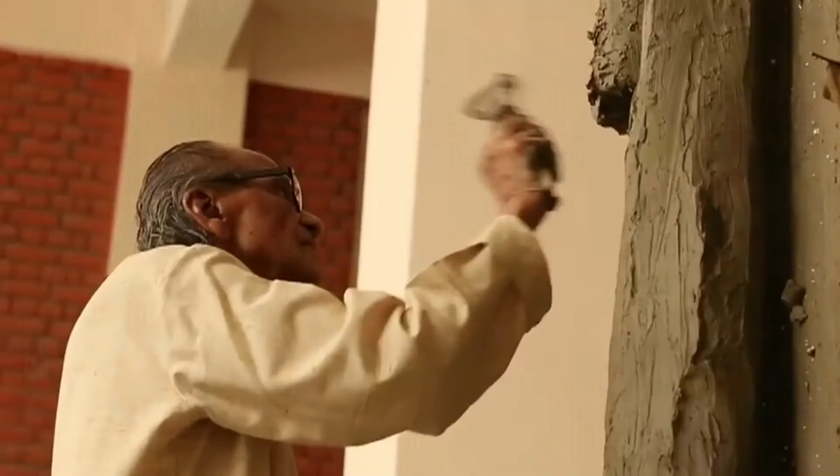The honor of sculpting Sardar Patel's likeness went to Padma Bhushan awardee Shri Ram Sutar. The first challenge was to select an apt pose and expression to do justice to him. Although L&T's role was that of an EPC contractor, they still took active interest in the selection process. Extensive discussions with historians and experts ensued. After sifting through thousands of photographs, the team was unanimous in how the statue should look.

Shri Ram Sutar created sculptures in varying sizes, honing every detail again and again. The latest 3D scanning techniques and computer-controlled production ensured accurate reproduction of minute details.

Immense statues the world over have a broad base to achieve structural stability. Sardar Patel's statue was slated to be the tallest ever, and the greatest task was to achieve the design. His dhoti needed to end above the ankle. He is in a walking stance, thus the feet were not parallelly aligned. The assertive stride meant a gap between the feet. But the L&T team was equal to the task.

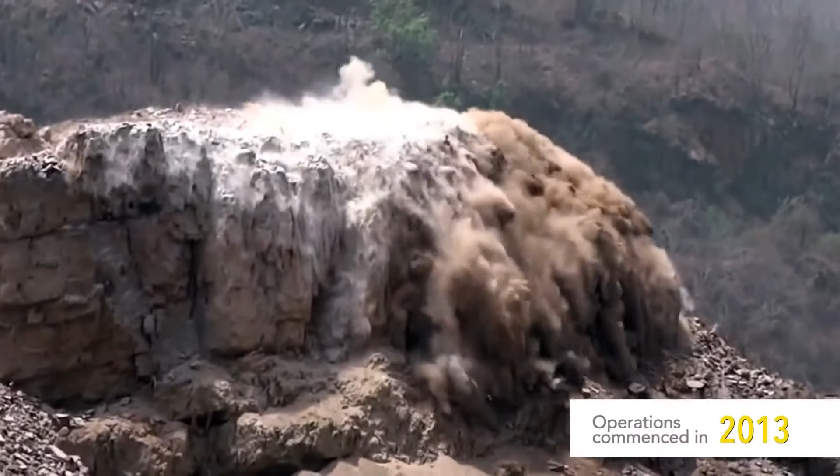Operations commenced in 2013 with exhaustive surveys of the land, riverbed, river and wind. This was followed by critical engineering design, a test of L&T's experience and technical capability. In such a remote location, planning and logistics would be the key to all the operations.

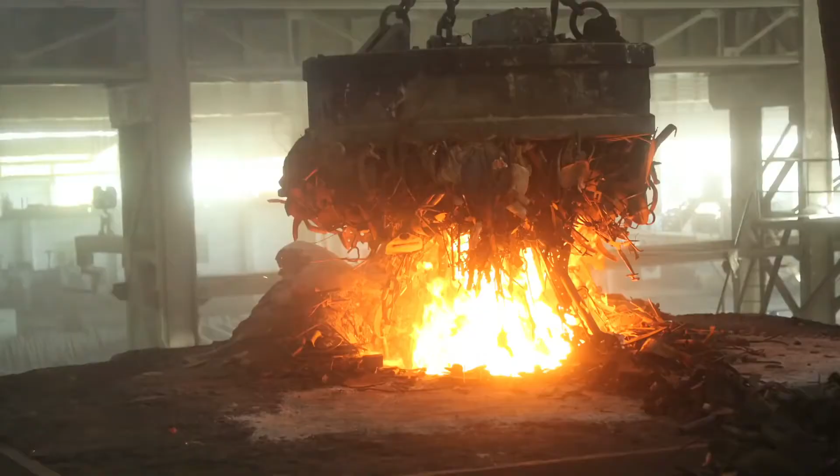The Loha campaign was launched in earnest with a view to employing used implements donated by farmers around the country as a symbolic tribute. This iron forms the steel rebar in the raft foundation, a homage to the Iron Man of India.

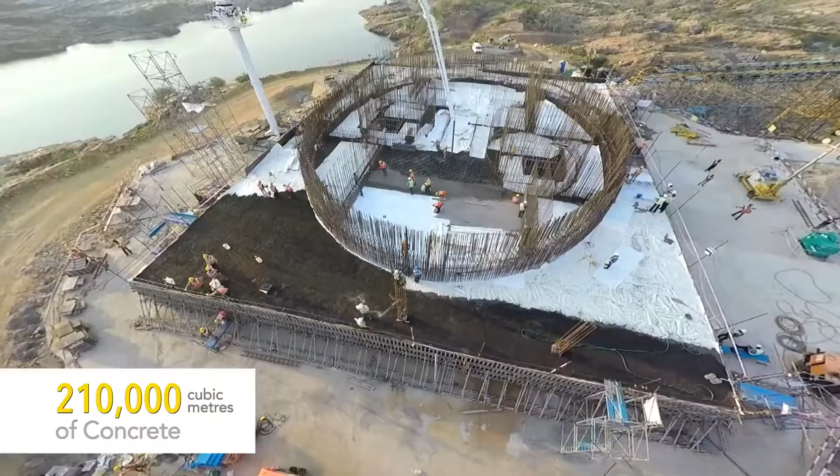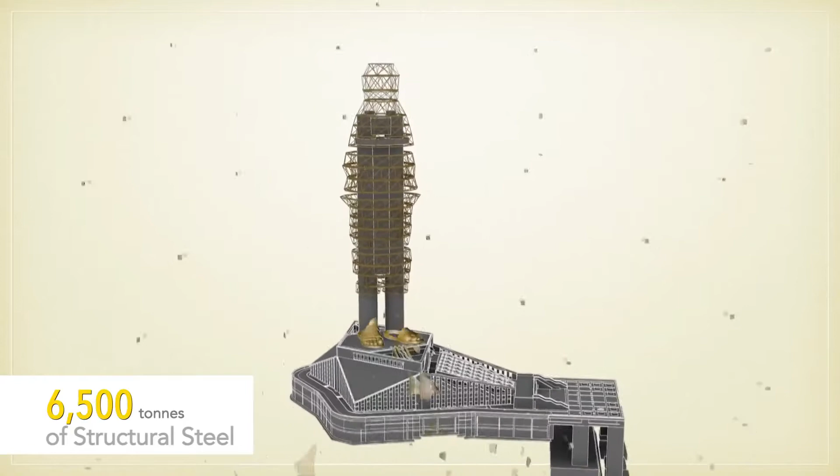A reinforced concrete core, created with critical concreting methods, gave the structure a stable base. This would support the primary and secondary steel trussing. The bronze plates then covered the entire structure, forming the sculpture. Locally available sandstone and Banswara marble has also been used.

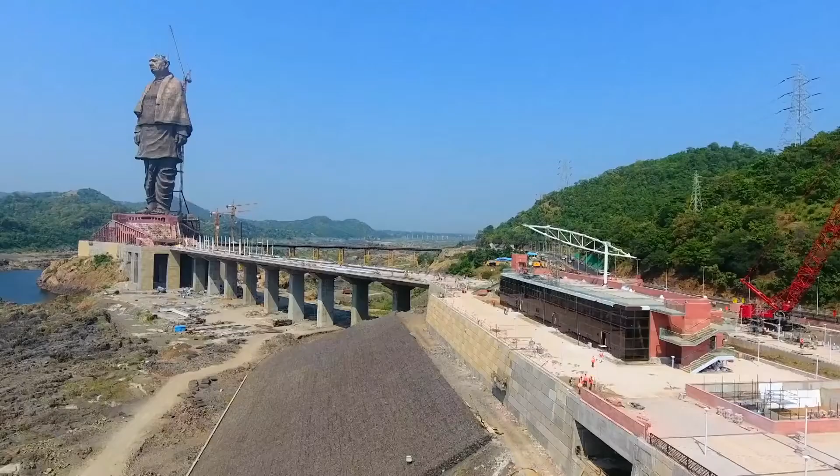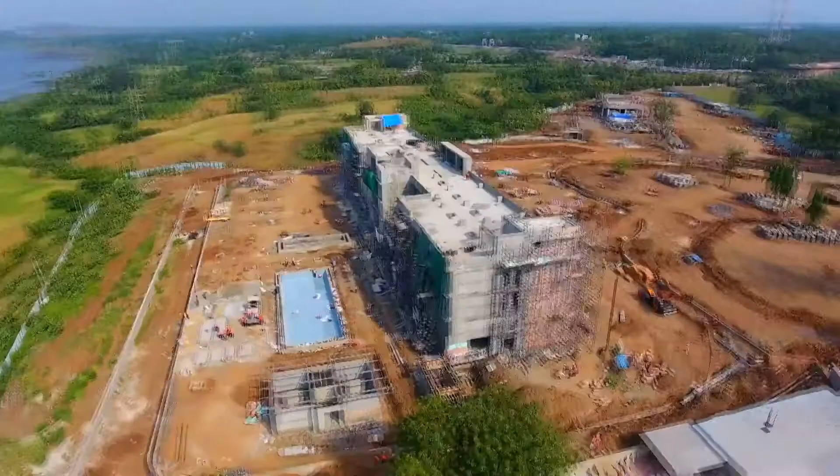Besides the statue, other key elements like the memorial and visitors center, main access bridge, bridges and roads were made to precision. The Shrestha Bharat Bhavan is a 3-star facility for the tourists and guests.

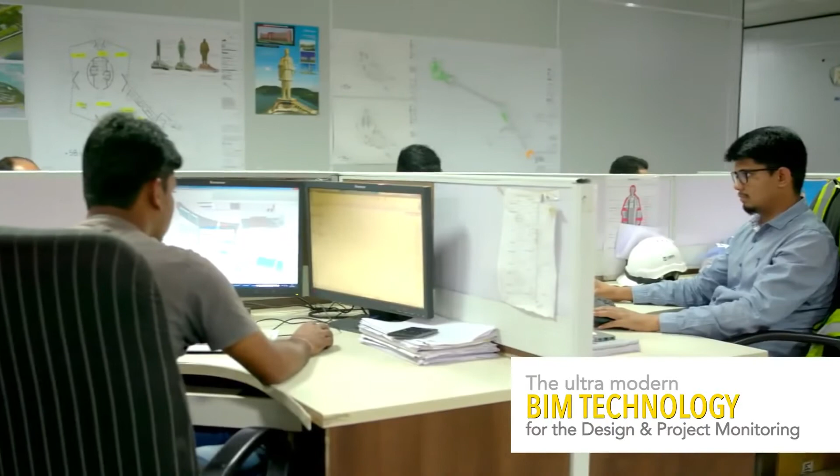To bring socio-economic development to the region, students and vendors from nearby villages and towns were also trained for the project, thereby generating ample employment. The ultra-modern BIM technology for the design and project monitoring brought synchrony between the team and 30 consultants globally.

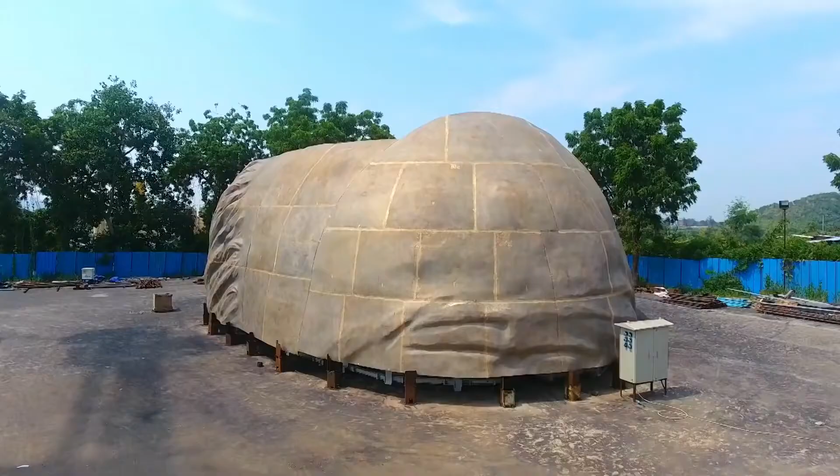The statue houses two 250-ton suspended tuned mass dampers to make it stable enough to withstand violent winds plus seismic activity. L&T created macro panel assemblies on site for the smaller micro panel bronze castings. This ensured speed and seamless assembly. Every plate was unique and RFID tagged and bolted in its place.

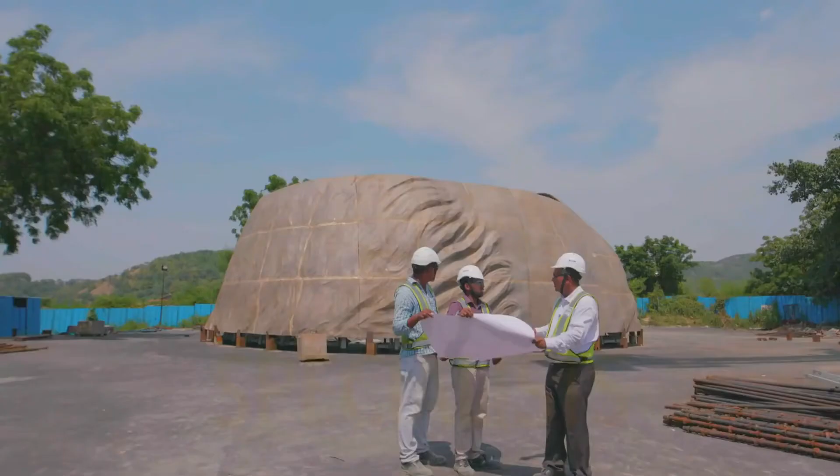As work progressed at blazing speed, the engineered structure transformed and the statue began to take shape. Designers, engineers, experts, specialists and workers from different parts of India have toiled night and day in a united effort unto one goal: the Statue of Unity.

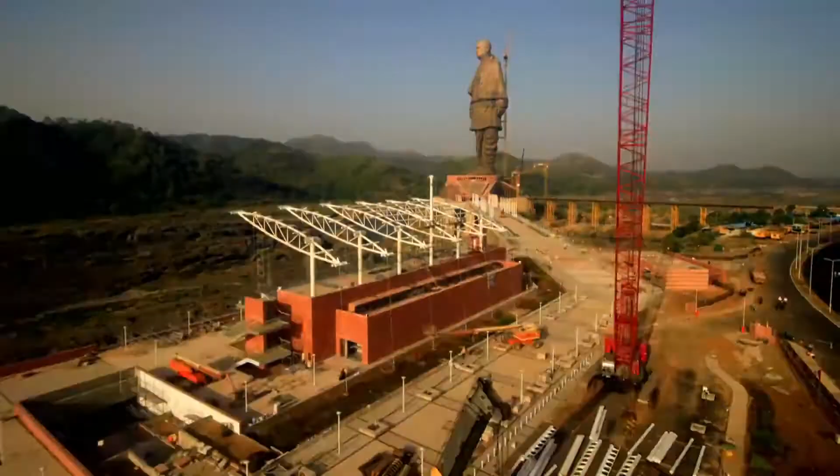Colossal enough to remind future generations of his epochal contribution. A structure as enduring as the vision of modern Indian nationhood. As Sardar Vallabhbhai Patel himself said, 'Manpower without unity is not a strength. Only when harmonized by unity does it become a spiritual power.'